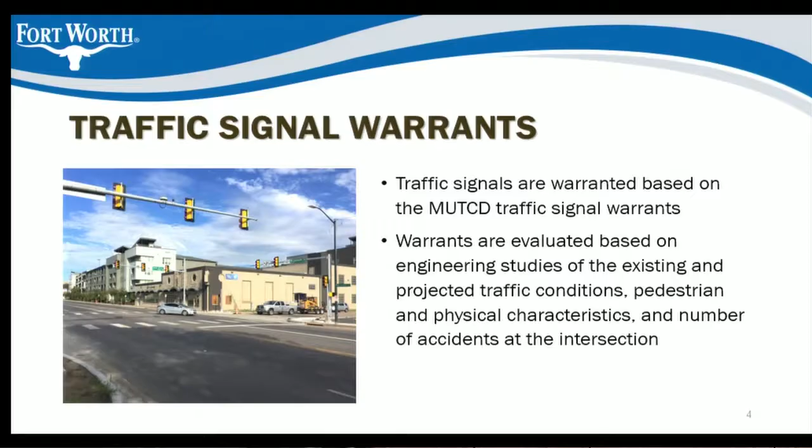As you know, the traffic signal has to be warranted before starting design. The traffic signal warrant is based on the MUTCD, the Manual on Uniform Traffic Control Devices. And the warrants are evaluated based on engineering studies where you count the existing or projected conditions, pedestrians and accidents. The projected conditions mainly refer to a new development that will generate traffic volume that justifies or warrants a signal.

Prior to design, the consultant or the designer can get the information listed here, either from Buzzsaw, or they can contact us and we can mail this information. As you see over here, we have the sample set, the CAD cell library, the latest general notes, and the standard detail specifications from Buzzsaw. By the way, they are migrating Buzzsaw information. We also provide the traffic signal guidelines and the cabinet and controller specification.

We highly recommend that the consultant contact us prior to design. We would like to have a field meeting, and this will help both of us. In the field meeting, we'll go there to locate the power source and find a good location for the electrical service, the cabinet, the signal pole and so on. Before we go there, the consultant has to call DigTESS about 3-4 days ahead in order to mark the utilities, which will help us locate where the pole is going to be.

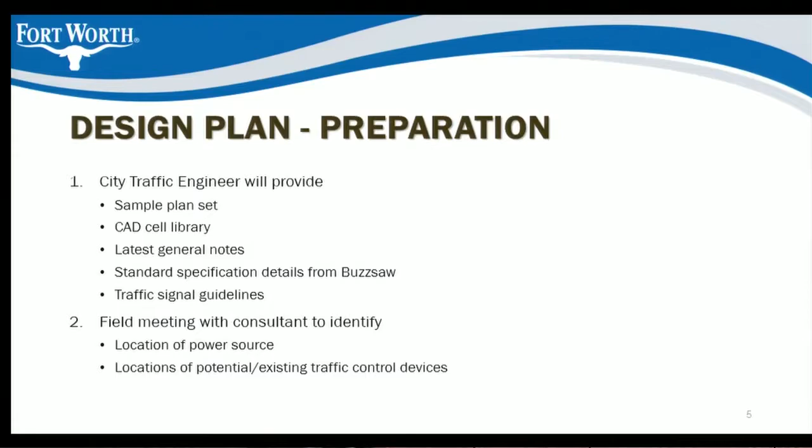After that, the traffic signal design plan should include, as you see, the following: the cover sheet, the general notes, the index, and the quantity summary sheet. The quantity summary sheet should have all the pertinent items. Also, you have to show the existing and removal and proposed signal layout.

At the end of the design plans, you have to put all the detailed standard sheets, and you should have one on each sheet. Some consultants have like four in one. When in the field you have half size, it's very hard to read those. You also have to have the signs and marking sheets, and in each marking and signing sheet show the quantities in a tabulated form.

You also have to show approved City or TxDOT ADA ramps, and detailed corner sheets; for this one, you have to show each corner detail in a separate sheet by itself. And of course, you have to show the summary of the conduit and cable wire sheet, showing the inside and outside cables and wires in that chart. You have to show the signal pole location too.

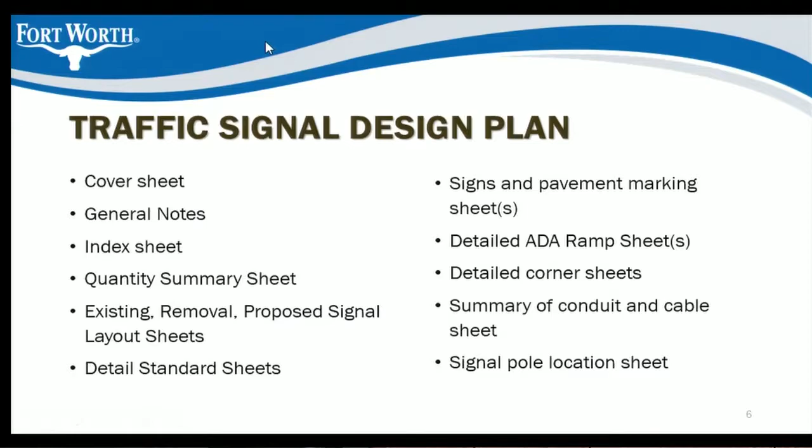Make sure you try to keep the signal poles at least 3 feet away from the curb, because if a truck is turning, it could damage the pole or the signal. Also, you have to show the overhead and underground utilities, number and label all signal infrastructure, show the red light camera if applicable, and preemption if needed. You have to show the type of detection too.

Mainly we use hybrid type detection and PTZ camera, pan, tilt, zoom camera, location. You need to show the type of poles, with or without luminaires. It depends on the overhead; if you are within 10 feet, put luminaires and so on. And show the length of the mast arm, the ground boxes, the conduit, etc.

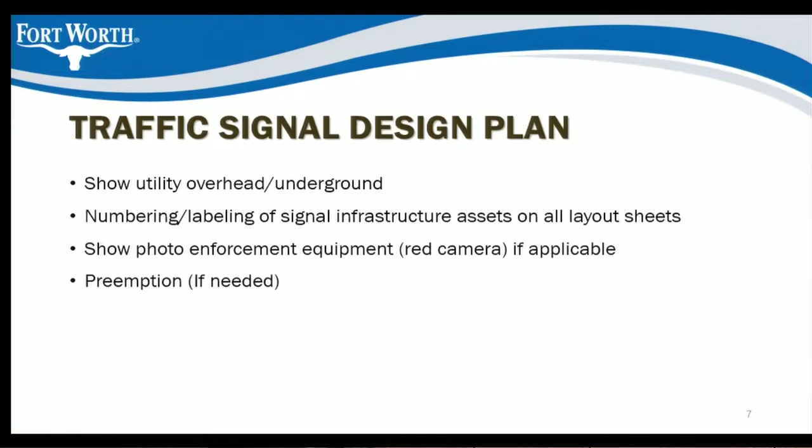For this one, the pole location, you have to show dimensions, which we have in the other one. You have to show how far from each curb over here to tie it up, bottom line.

And when you're numbering the signal poles, assuming this is north-south, you start from the northwest corner with T1, T2, T3, T4. And if for some reason you have to have a ped pole because of ADA requirements, you need also to start from here, P1, P2, 3, and so on. Maybe you need 1 or 2 ped poles.

And with respect to the numbering, you have to start also from the northwest corner, signal phase 1, 2, 3, and so on. You go clockwise. And you have to show also the cabinet location. And we suggest that the electrical service and the cabinet be on the same slab foundation. And we have a detail. We can email it to you.

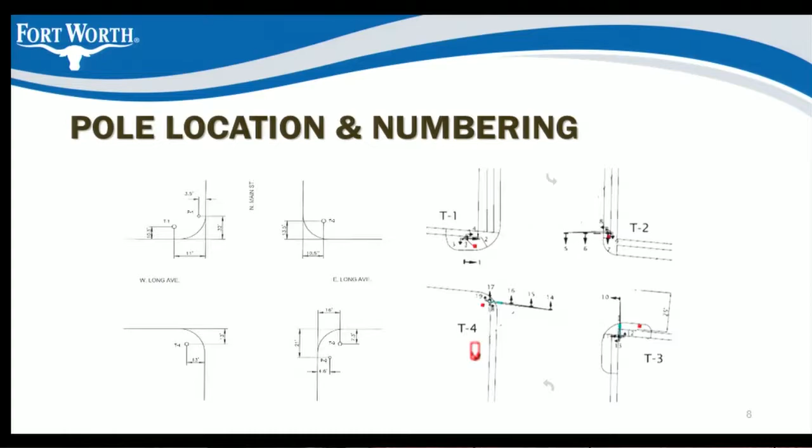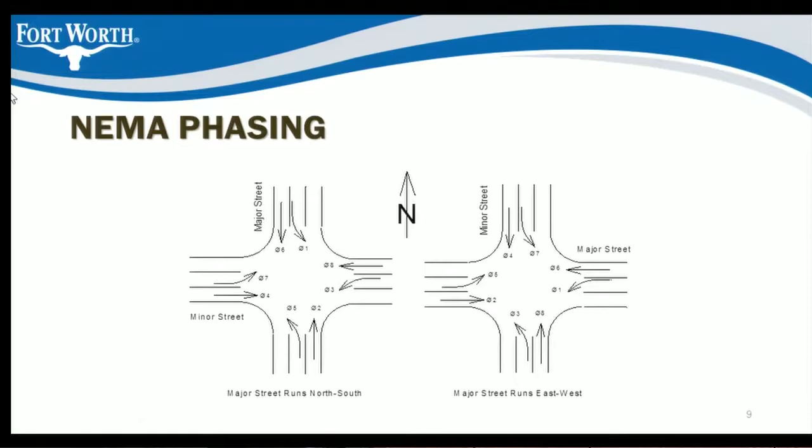Also, sometimes we have consultants who don't follow NEMA phasing. Normally, according to NEMA phasing, if you have the major street east-west, you start with phase 2, phase 4, and so on clockwise. And if north-south is the major, you start with northbound as phase 2, and so on. That will help our technicians in the field if you follow that.

Also, I know you submit 100% design to IPRC, so you respond to all city comments, and you have to resolve any utility conflict, and I'm sure you circulate for signature. And for us, the traffic signal section, we need you to deliver, whether by mail or in person, an electronic file, a CAD file. Some people say they have MicroStation. We use AutoCAD. You have to convert it. And also an electronic PDF, 11 by 17, and a hard copy.

Because sometimes consultants ask us, do you have as-builts? So we have to look for as-builts. In this case, we will have those in our office. And prior to construction, as noted in the latest general notes, the contractor has to contact us at least 2 weeks in advance in order to bring the cabinet and the controller in order to time it, because we have to do timing, and we have to test it in the office before we take it to the field.

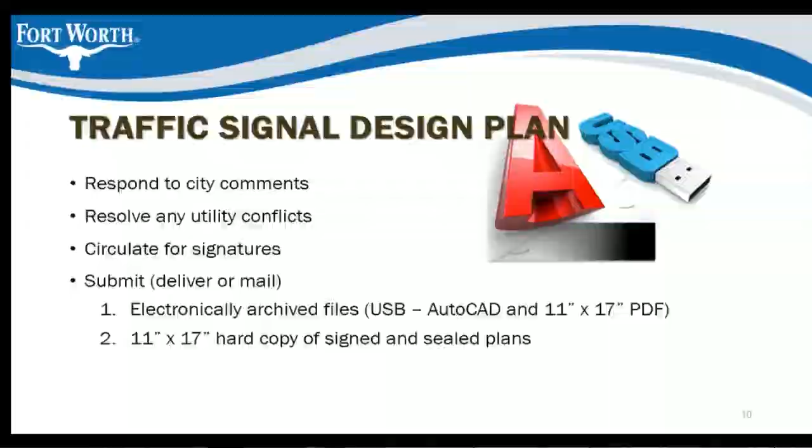This is pretty much it in a nutshell. Yes, we leave the questions at the end, right? Okay, thank you.

Good morning, everyone. Are you awake? Maybe? Yes?

I'm Marisa Conlon, and I'm the new Senior Capital Projects Officer in Traffic Management, responsible for transportation operations. And this morning, I'll be discussing streetlight design with you. We're going to cover a few items today. Mainly, we're going to do a streetlight overview. Then we're going to talk about our policies and procedures, our design requirements, and finally, our pre-qualified contractors.

Okay, so for those consultants in the room, how many of you have been confused by the City of Fort Worth streetlight design policies? Quick show of hands. Thank you, we appreciate the honesty. Yes, it is very confusing, and one of the reasons for this is because the city owns and maintains its own lighting system. And what this means is that we as a city made the choice to purchase a system from the electric utility company many years ago. This was way back in the 20th century, right?

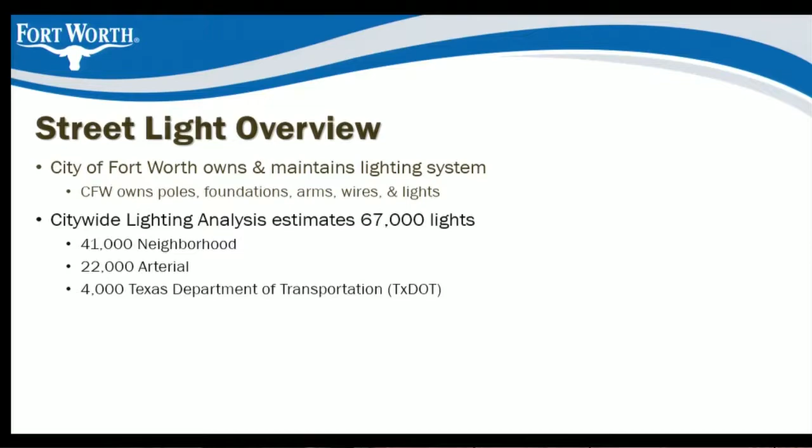This is a little bit different from some of the other TxDOT maintenance agreements. The city, for example, is actually required in this case to pay for the electric bills. So we go ahead and do that, and we have our staff and contractors who help us take care of the freeway system. Now, a lot of our policies you might be wondering about, but our policies are all based on the fact that Fort Worth owns and operates its own system.

We did have policies going back to the Brown Book from 1987, but in the modern era, we really started back in 2001 when the policy for the installation of community facilities agreement was adopted by the city. This was really the first time that we said that we wanted to install more lighting in neighborhoods. And this is where we start giving the guidance for that additional lighting in the neighborhoods. In 2015, the CFA policy on Section 8 for street lighting was revised. And at that point, it really was just mainly some minor changes to the 2001 policy.

What's key out of this, though, is for those with questions, the arterial light spacing was established here. That's every 200 feet. The neighborhood and residential spacing was also established. This is 200 feet. And then the decorative spacing was established at 150 feet. As long as you meet these spacing requirements, we do not require engineering studies for the lights. However, if you choose to deviate from this policy, you will be required to submit an engineering study. And again, this is all covered in Section 8.

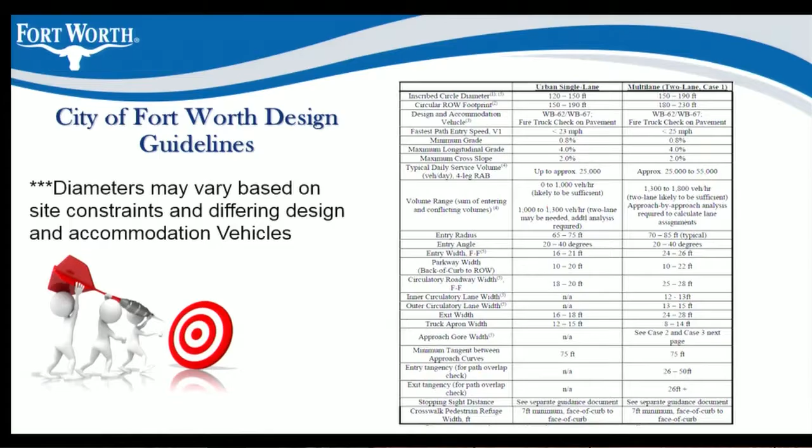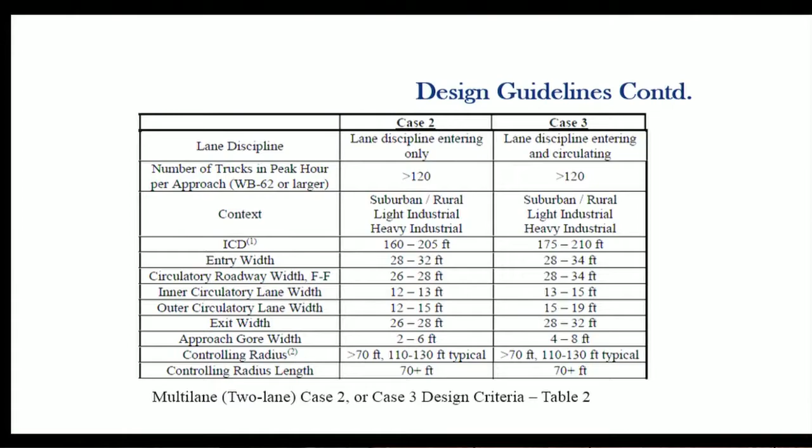You want to pass this around? Yeah. Continuing on the guidelines, it gives you number of trucks per hour, the entry width, and it talks about the inner and outer circulatory circle, etc. So these are your technical guidelines to follow. These guidelines were developed for the 2014 bond program, and then we did a minor update to them in terms of striping and signing.

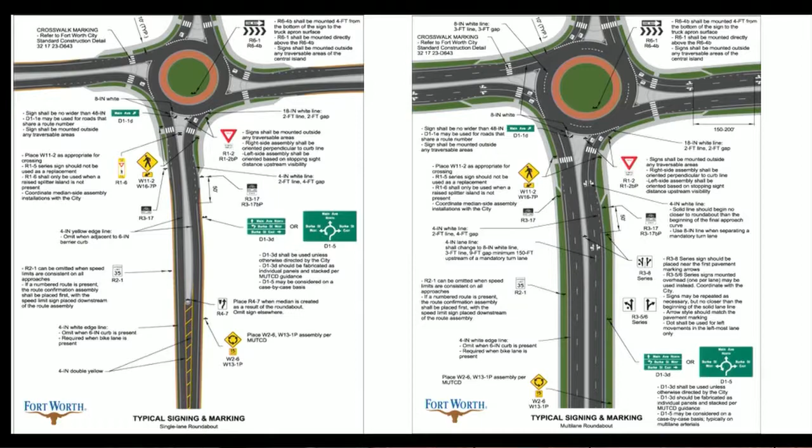The most important element of your roundabout is your geometry, your horizontal design. That's really critical, because if we're not meeting the desired entry speeds, or the fastest path analysis indicates that traffic is going through there too fast, then that's going to require quite a bit of tweaking, and that impacts your design overall. So the horizontal alignment is the most critical thing for the roundabout, and then you supplement with the signs and the striping.

So, additional documentation that you should include with your submittal for review. Your design approach speed: we're striving for less than 25 miles per hour for your entry speeds. We were designing about 25 to 27 miles per hour for entry speeds back in 2013 and 2014, and we finally determined after 5 years of studying our roundabouts that that's too fast. So we are trying to achieve less than 25 miles an hour for entry approach speeds, preferably 22 to 24 miles per hour.

Your number of lanes: you can handle about 25,000 vehicles a day with a single lane roundabout. So more is not necessarily what you need; a single lane roundabout can do a lot for you. Your design vehicle: is it only for passenger traffic? Are you going to have trucks with attached trailers? Are you trying to accommodate a larger vehicle? You don't need to design everything for the WB-67, which is your 18-wheelers.

So keep that in mind, all right? Your traffic volume to support the roundabout layout. So like I said, if you don't anticipate that you're gonna have more than 25,000 vehicles traveling through there a day, a single lane roundabout probably can do the job.

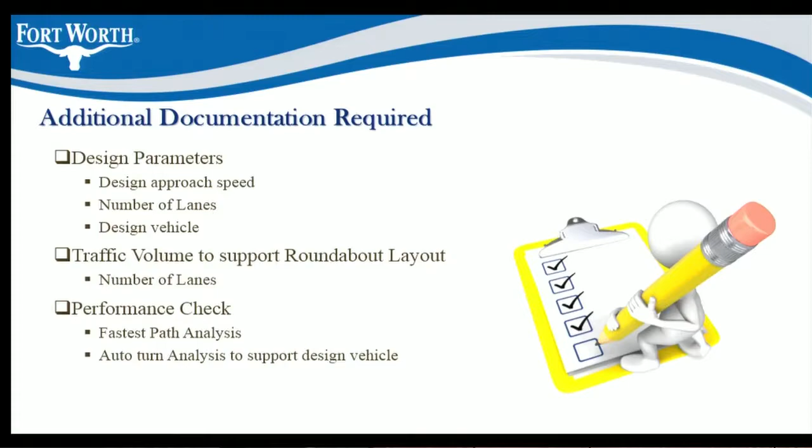And your performance checks, this is really important. Your fastest path analysis and your auto turn analysis showing that you can accommodate whatever design vehicle you're submitting in your design, in your horizontal design. This information is included with the set of plans and is submitted for a peer review, okay? A third-party peer review. I manage that contract with MSA.

So for the process, follow your design guidelines that we just talked about. Submit your plans, including that additional documentation. If you are submitting a set of plans for a development that includes a roundabout, identify that with your submittal, that you have a roundabout in your set of plans and that you're requesting a peer review to be performed. Your IPRC project manager then will submit a request to me for the peer review to be performed.

We have a contract with MSA, doing business as Ourston Engineering, and they're the subject matter experts when it comes to roundabout design. So I will prepare a task order, issue it and submit it to MSA with the information and then try to get back with you as soon as possible. We know that your design review times are 2 weeks.

Mike? Did Mike leave? Vic?

Is it 2 weeks? So we try to get these in and turned around from MSA in a week or less, because we know that you have a pretty tight time frame for review. Once the peer review is completed and you get the comments back from MSA, if you have a lot of concerns or issues, or the comments are really altering your design and you're pretty much locked in with your right-of-way and everything, you can request a meeting with MSA to discuss these comments and see if some of them can be addressed through that methodology.